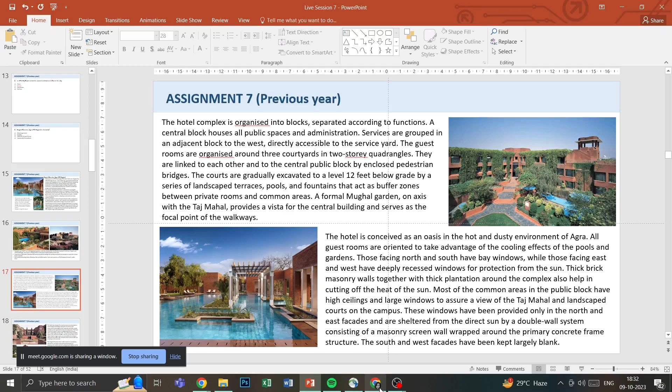These windows have been provided only in the north and east facades and are sheltered from direct sun by a double wall system consisting of a masonry screen wall wrapped around the primary concrete frame structure. The south and west facades have been kept largely blank so that sun penetration can be controlled.

The hotel was designed to avoid unnecessary dependence upon foreign technologies, basing the structure and construction technology on materials and skills readily available in the region at the time of construction.

The basic structure for guest rooms is load-bearing masonry walls supporting concrete slabs. The central block of public spaces, the pedestrian bridges, and the service block, all of which require longer spans, are concrete frame structures with concrete waffle slabs. Brick has been used as infill and as facing on the concrete.

The Mughal Sheraton Hotel, while modern in its vocabulary with forms and shapes derived from its functional use, expresses the culture and rich architectural traditions of the region. Basic structural elements of Mughal architecture have been revitalized and integrated in the complex.

A sense of strength and grandeur, a contrast between inside and outside, a highly developed and sophisticated approach to the use of landscaping and water, open spaces and garden, light and air as an integral part of the built form.

So this is what I was saying, that it is a modern building because of its form, shape, and it being designed in the sense of functional use. However, it has a strong expression of architectural Mughal architecture.

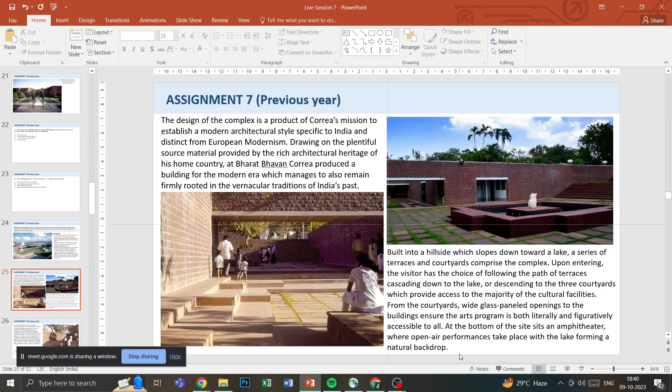The route through the terraces encourages movement down the site's natural gradient, with the courtyards providing tranquil spaces for rest and relaxation. The dialogue between these two components creates an ebb and flow of energy around the complex, in what Correa described as a ritualistic pathway. The ritual of following a sacred pathway is, he claims, a universal impulse found in all cultures and religions. Correa emphasized the spirituality of his own pathways by drawing parallels with those found in religious architecture, including the Sun Temple of Mexico and the Hindu temples of Bali, with their ritualistic pathways up the hillside.

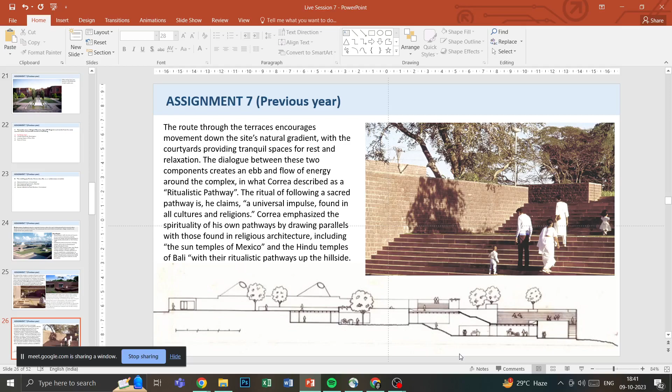At Bharat Bhavan, the flights of stairs between the terraces reference traditional Indian architecture while implying the sanctity of the pathway. The stairs are reminiscent of ghats, the steps found in Indian cities which lead down to a body of holy water, just as Correa's steps guide pedestrians to the lakeside. Indeed, Correa cited the bathing ghats on the bank of the River Ganges at Varanasi as a stylistic influence. At Bharat Bhavan, the steps guide the pedestrians to the lakeside, the religious connotations emphasizing the sacred nature of this pathway.

So he has taken his inspiration for this ritualistic pathway from various cultures and examples, such as the sun temples of Mexico, the Hindu temples of Bali, and the idea of providing so many steps. If you see in this image, the idea of providing these many steps, he has taken this inspiration from the Ghats of Varanasi, which shows how, even though this building is a modern building with its functionality and form, its ideologies are somewhere rooted in the culture, tradition, and vernacular architecture of India. This building is climate responsive, and it is culturally significant to India because it was designed to represent Indian culture. So he has taken his inspirations from those points.

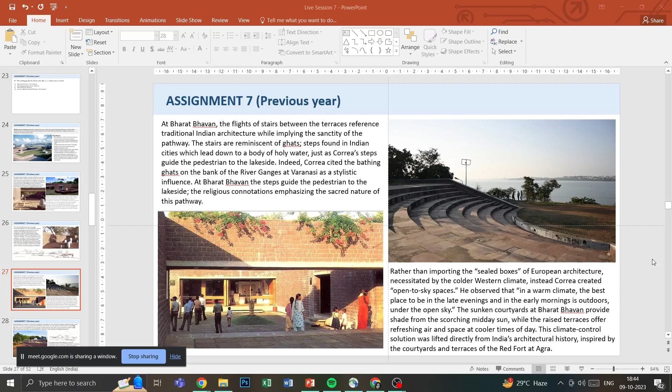At Bharat Bhavan, the intention is that those emerging from the galleries to the courtyards undergo a similarly dramatic spatial experience. The sky is even incorporated into the interior spaces with concrete shells atop the structure, allowing light and air to pour in through circular openings. From the exterior, these shells seem to reinterpret another feature of India's architectural vocabulary, the decorative chhatris or umbrellas which originally sat atop Rajasthani palaces. In these gallery spaces, which are mostly underground, he has given these shell-like structures as inspiration from the chhatris. However, while chhatris are usually not open, these shells are open from the top, acting like an oculus that lets light and air into the gallery spaces and other spaces in the complex.

The outdoor spaces at Bharat Bhavan are physical manifestations of the concept of empty space, a recurring theme in India's visual culture and philosophy. Away from the activity within the buildings, the courtyards provide a contemplative void enhanced by the placing of sculptures at their center. These act as meditative focal points for the viewer, much like the solitary tree often found in the center of Japanese courtyards. Correa's characteristic use of the void as an architectural tool has been widely described as non-building.

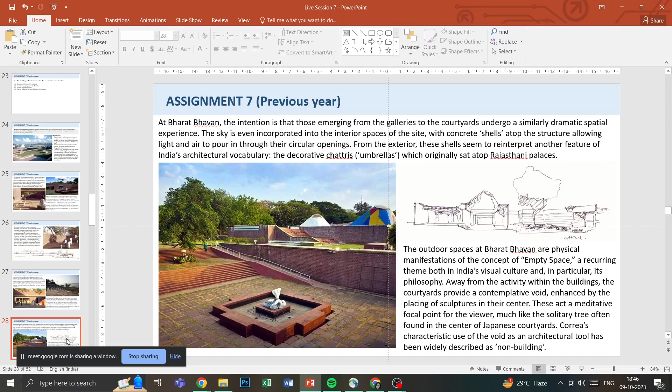So the answer is: this building by Charles Correa classifies as a subterranean structure. The answer is Bharat Bhavan, Bhopal.

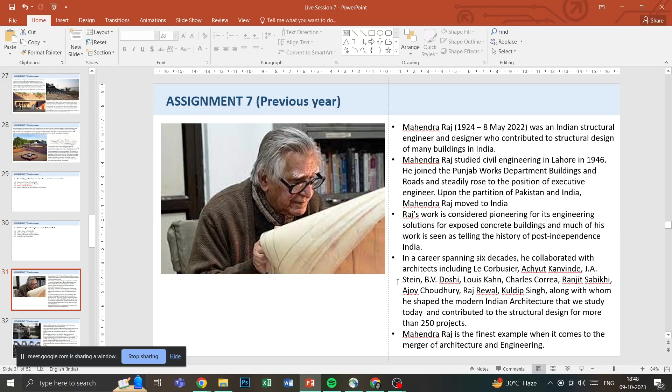In a career spanning six decades, he collaborated with architects including Le Corbusier, Achyut Kanvinde, Joseph Allen Stein, B.V. Doshi, Louis Kahn, Charles Correa, Ranjit Sabikhi, Ajoy Choudhury, Raj Rewal, and Kuldip Singh, along with whom he shaped the modern Indian architecture we study today. He contributed to the structural design of more than 250 projects. Mahendra Raj is the finest example of the merger of architecture and engineering.

His first work in India was with Le Corbusier on Chandigarh, India's planned city. Later, after learning that India lacked education related to structural design, he moved to America to pursue a master's degree in Minnesota, then to Columbia University for a postgraduate degree. After seeking these degrees, he moved to New York and joined Ammann and Whitney, consulting engineers, until 1959. There, he worked on famous structures like Eero Saarinen's TWA building.

In 1960, Mahendra Raj decided to move back to India and start his practice, Mahendra Raj Consultants Private Limited. After returning, his first project was a temporary structure designed for the 1961 Industrial Fair in Delhi, the Hindustan Lever Pavilion. His career was defined by the great period of India's post-independence modernization, which saw vast construction opportunities that changed the face of the young country. In the exhibition, a quote by Raj Rewal reads: 'Mahendra Raj has carried the whole of modern Indian architecture on his shoulders. My interaction with him was like a jugalbandi that helped me enhance and execute my vision.'

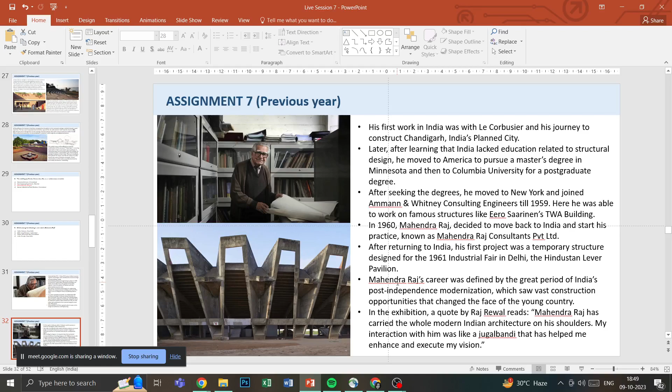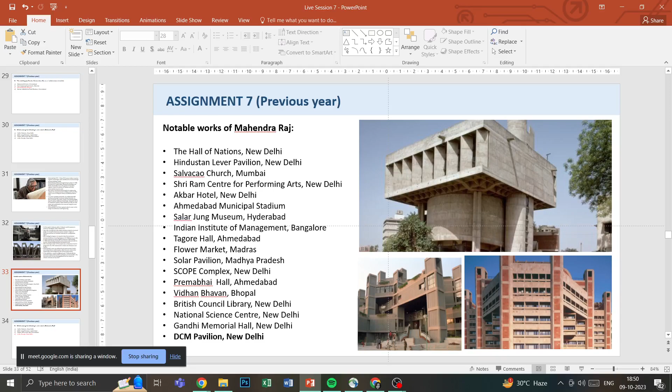Our answer is Lotus Temple, New Delhi. So, Hall of Nations, New Delhi by Raj Rewal. Mahendra Raj was the structural engineer for all three projects: Hall of Nations, New Delhi; Salar Jung Museum, Hyderabad; and Tagore Memorial Hall, Ahmedabad.

Coming to question number 7.

In the Hall of Nations, Mahendra Raj used this as a basic design module: geodesic dome, geometry of pyramid, truncated icosahedron, cut cylinder.

Hall of Nations was an exhibition hall inaugurated in 1972 as part of the Pragati Maidan complex in New Delhi, India. It was built to celebrate 25 years of Indian independence. It was designed by architect Raj Rewal, who went on to win the gold medal of the Indian Institute of Architects in 1989. It was inaugurated by Indira Gandhi for the India International Trade Fair.

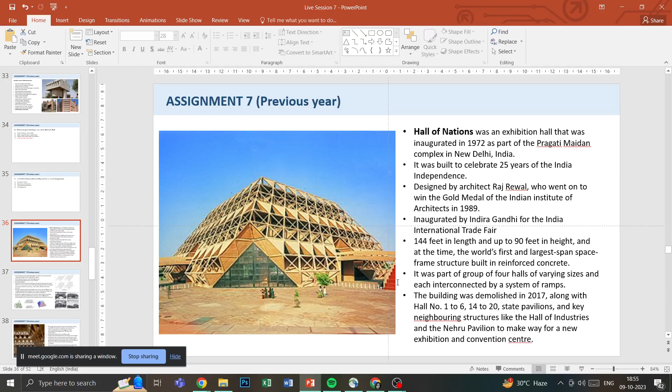During the design development, the structure demanded a lot of steel frames, but with steel scarce in the market, Raj Rewal and Mahendra Raj took the opportunity to explore precast concrete elements. Because of the lack of steel in the Indian market, they used precast concrete for this 3D lattice, and at that time it was the world's first and largest span space frame built in concrete. Steel was used in a lot of parts of the world, but built in concrete, this was the world's first structure like that.

The design was evolved to meet the constraints of time, availability of materials and labor, but above all to reflect symbolically and technologically India's intermediate technology in the 25th year of its independence. This design evolved because of constraints of time and availability of materials and labor, but most importantly, it reflected the technology India had at that point. The world was growing at a different pace, but in the 25th year of our independence, what we had available in India at that time was used in the construction of this building, and that is what this building represents.

The space frame structure, made of concrete, is both a structure and a brise soleil. It also draws inspiration from Mughal jali work with the geometry of hexagons and triangles.

The depth of the structural system was utilized as a sunbreaker, conceived in terms of the traditional jali, a geometrical pattern of perforation that obstructs direct rays of harsh sun while allowing air circulation. Because this structure is a tetrahedron, it has a width, and that width is good enough in size to help this space frame act as a sunbreaker or jali.

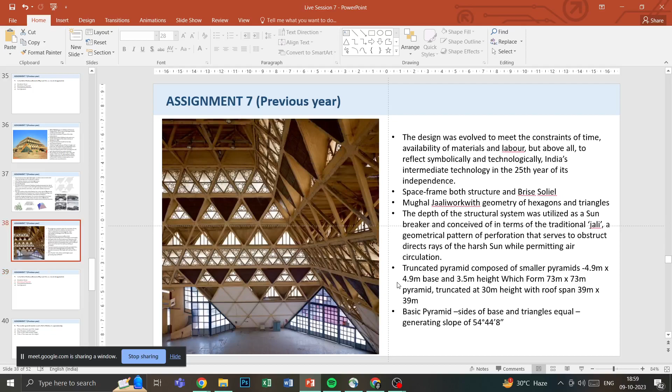As learned earlier, the truncated pyramid is composed of smaller pyramids of 4.9 meter by 4.9 meter base and 3.5 meter height, which when completely added leads to a 30 meter height structure with a base of 73 meter by 73 meter. So the answer is 4.9 meter by 4.9 meter base and 3.5 meter height.

Question number 9: The trusses used in the STC building by Raj Rewal are called bowstring trusses, king post trusses, Vierendeel trusses, or lenticular trusses.

So what is the STC building? The State Trading Corporation building, or STC building, also known as Jawahar Vyapar Bhavan in New Delhi, India, was designed by architect Raj Rewal and is home to the government-owned State Trading Corporation of India.

It spans 2,20,000 square meters for offices, hotels, cinema, museum, art gallery, and shops. Built between 1976 and 1989, it is considered a very important example of modernist architecture in post-independence India. The structurally expressive design employs Vierendeel trusses. Apart from offices, the building houses the Central Cottage Industries Emporium, a government-run store that retails Indian crafts products.

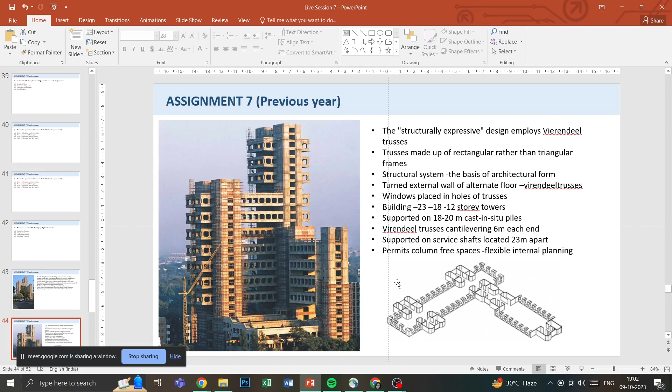The building had towers of 23, 18, and 12 stories, supported on 18 to 20 meter cast in situ piles. Vierendeel trusses cantilever 6 meters at each end, supported on service shafts located 23 meters apart, permitting column-free spaces and flexible internal planning.

So what is a Vierendeel truss? A Vierendeel truss is a structure where members are not triangulated but form rectangular openings - a frame with fixed joints capable of transferring and resisting bending moments. As such, it does not fit the strict definition of a truss since it contains non-two-force members. Regular trusses comprise members commonly assumed to have pinned joints. This style was named after Belgian engineer Arthur Vierendeel, who developed the design in 1896.

It is used for bridges, though its use for bridges is rare due to high costs compared to a triangulated truss. The utility of this type of structure in buildings is that a large amount of the exterior envelope remains unobstructed and can be used for windows and door openings. In some applications, this is preferable to a brace frame structure, which would leave some areas obstructed by diagonal braces.

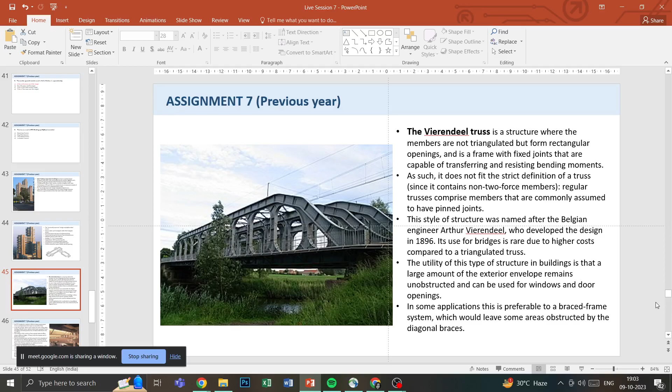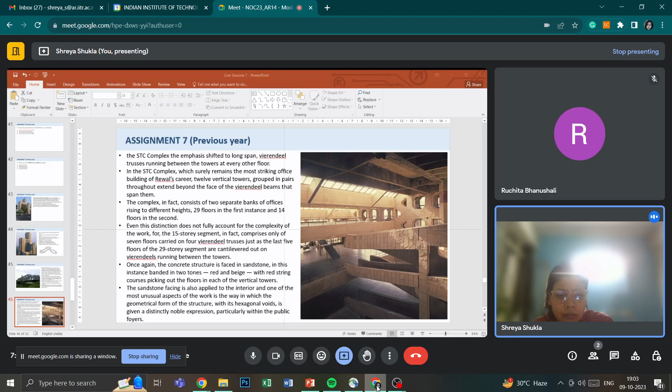The STC complex, the emphasis shifted to long span Vierendeel trusses running between the towers at every other floor. In the STC complex, which surely remains the most striking office building of Rewal's career, 12 vertical towers grouped in pairs throughout extend beyond the face of the Vierendeel beams that span them.

The complex consists of two separate banks of offices rising to different heights, 29 floors in the first instance and 14 floors in the second. Even this distinction does not fully account for the complexity of the work, for the 15-story segment comprises only 7 floors carried on 4 Vierendeel trusses, just as the last 5 floors of the 29-story building are cantilevered out on Vierendeels running between the towers.

Once again, the concrete structure is faced in sandstone, in this instance banded in two tones, red and beige, with the red string courses picking out the floors in each of the vertical towers. The sandstone facing is also applied to the interior, and one of the most unusual aspects of the work is the way in which the geometrical form and the structure with its hexagonal voids is given a distinctly noble expression, particularly within the public foyer.

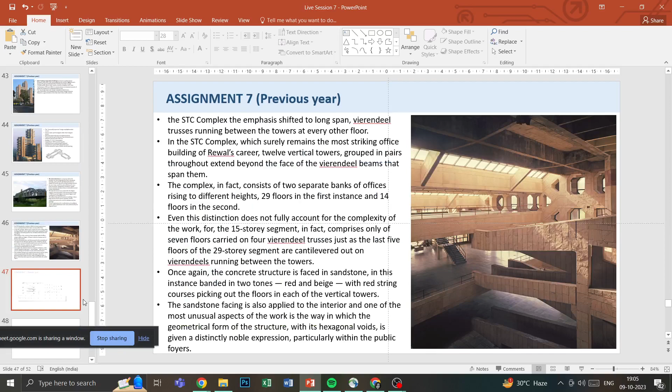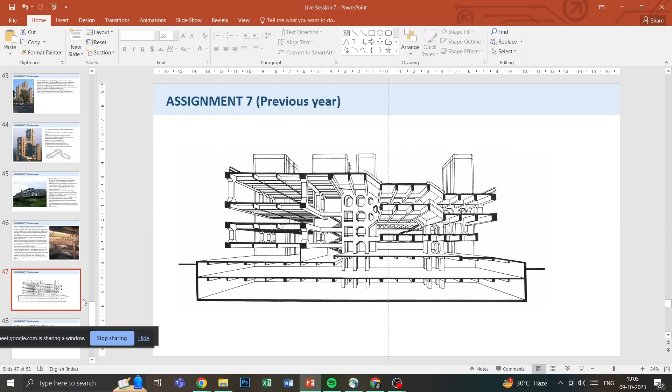This is a section of the STC building. So if you look closely in this section, you can see the structure and how the Vierendeel trusses have been cut over here. If you see on the left side, these are the Vierendeel trusses running, and you can see how they run through it. So the answer is Vierendeel trusses - the trusses used in the STC building by Raj Rewal are called Vierendeel trusses.

Last question of the day. The Imperial 3 Mumbai is the work of Foster Partners, Adrian Smith Gordon Gill Architecture, Perkins and Will, and MVRDV.

Okay, there is some glitch, or my slide has been deleted by mistake. I added one slide talking about the Imperial 3 Mumbai and it is missing right now. So I'll just quickly talk about it and refer to some Google pages for this. So the answer is Adrian Smith and Gordon Gill Architecture.

As explained on their own website, it is 116 stories high with 400 meters tall. Imperial Tower was designed to be the tallest building in Mumbai and a prototype for a city. It is still an upcoming project for a city that is densely developed with low-rise buildings.

The softly curvy linear form is aerodynamically shaped to confuse the wind, minimizing the negative effects of wind action on the tower. Wind vortex shedding is also mitigated by the north and south facing sky gardens, which break up the wind currents through the tower. When constructing a high-rise building, wind is one of the most important things to account for, because it creates different kinds of forces on buildings and can lead to sway. So there are always ways to tackle wind in high-rise towers.